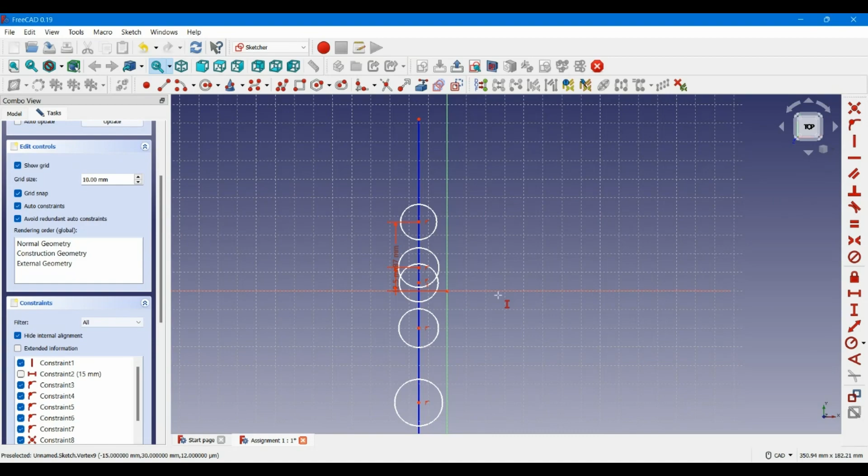The object that I have modeled is a test tube rack, which is a piece of laboratory equipment used to hold upright multiple test tubes at the same time. Common test tubes usually have a diameter anywhere between 10 and 20 mm with a length of 100 to 150 mm. This here is a sped up video of the entire designing process in FreeCAD. As it is being shown, I mostly use the sketcher and part workbenches.

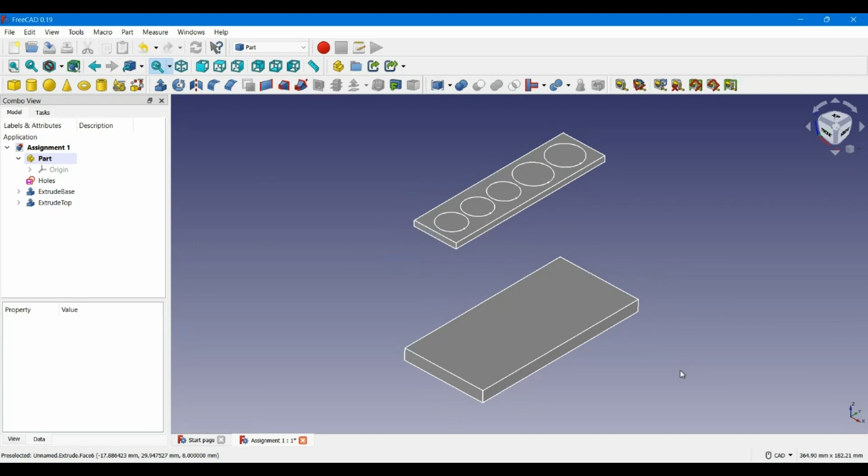First, I drew a sketch containing the 5 circles that would form the holes, 2 of diameter 22 mm, the rest of diameter 18 mm. Then I created 2 more sketches parallel to the XY plane, both of rectangles but with different dimensions. These 2 on extruding perpendicularly became the base and the top portion of the rack. Then I made the 2 side supports, similar process just parallel to the XZ plane this time.

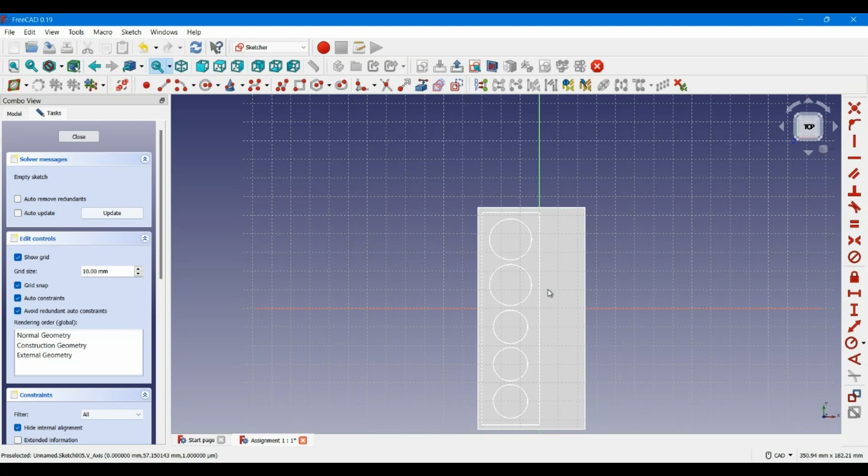Next was the row of vertical cylindrical protrusions over which inverted empty test tubes can be stored. For this, I again extruded a sketch containing 5 circles, diameter 9 mm each. In the exact same way, I then turned the first sketch into a row of cylinders through the top and subsequently cut out the holes by the Boolean cut operation.

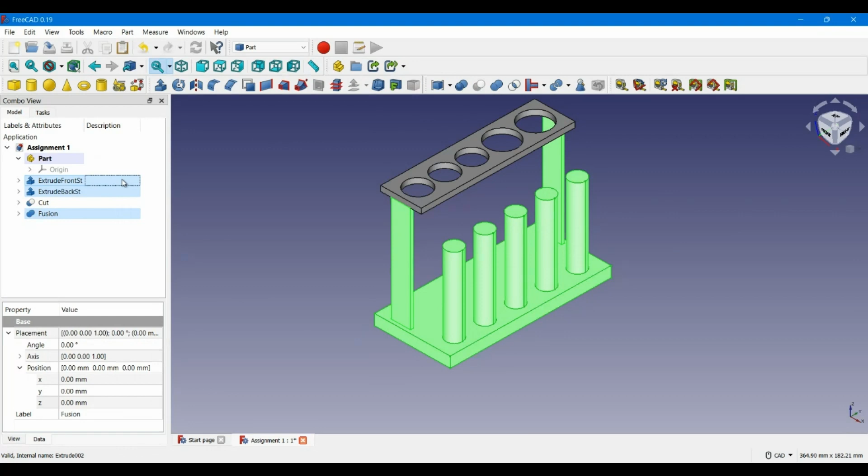Now here, using the cylinder tool is also viable, but I found extruding from a sketch to be an easier way to simultaneously get multiple cylinders. In general, several methods can be followed to make something. It's fine as long as we get the desired outcome.

Finally, I had to make a row of dents, one below each hole. These are there to prevent the bottom of the test tubes from slipping on the rack after they are put through the holes. I made a row of 5 spheres with appropriate radii, positioned them properly, and then used them to cut out the dents from the base.

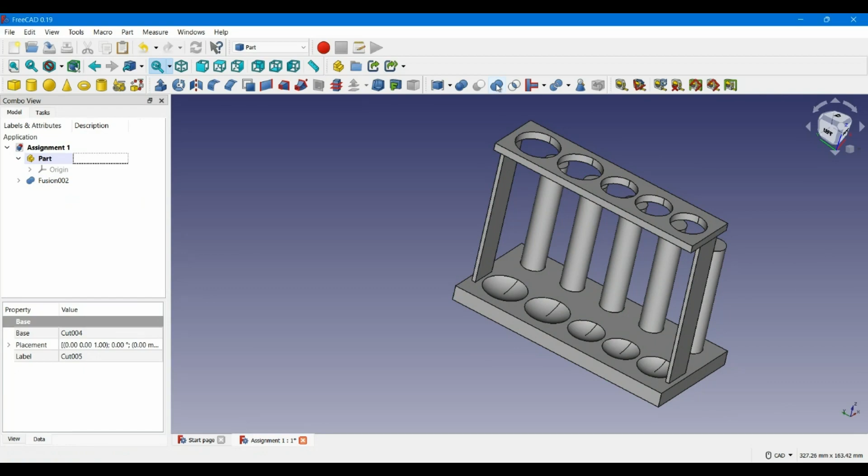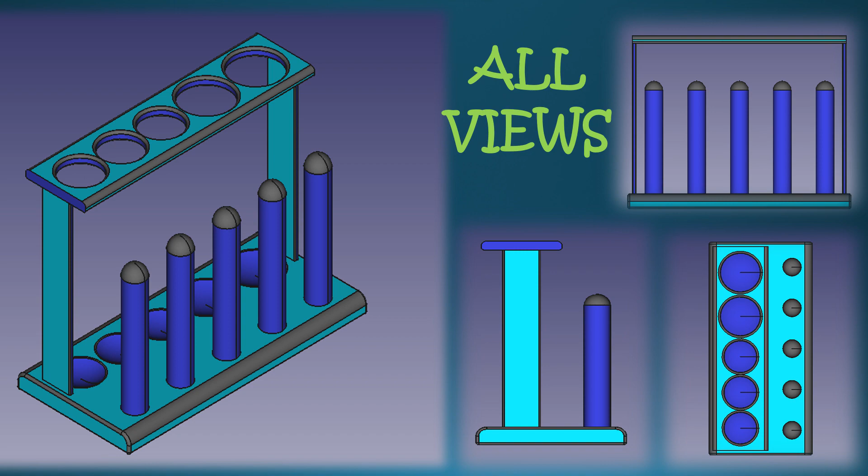Then I fused all these parts together with the union operator, but it was still quite crude looking. So for the finishing touches, I filleted all the sharp edges and corners. And while I was at it, I also colored the rack, which actually has no purpose apart from consuming time. Talking about time, what took the longest, of course other than getting the idea itself, was actually getting the dimensions of each component just right so that the final object looked realistic enough. In the end, this is how it looks from the top, side and front.

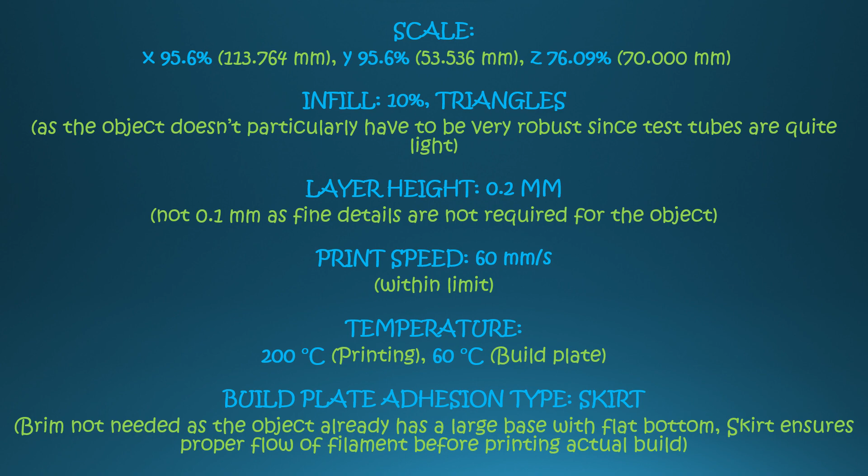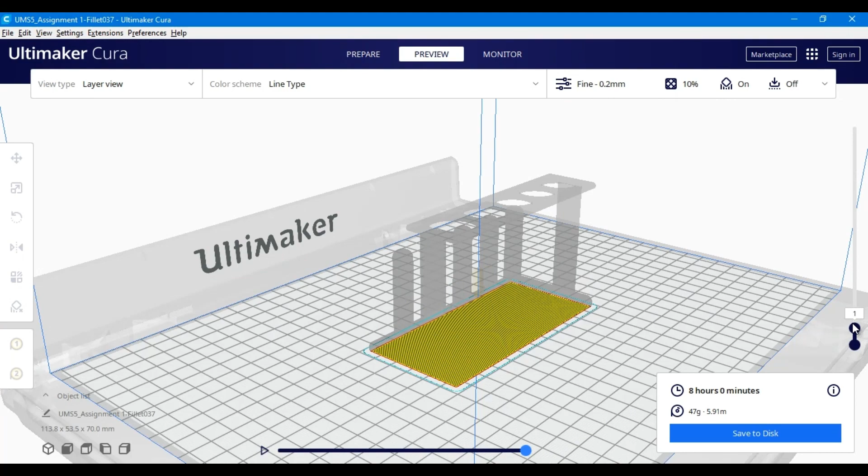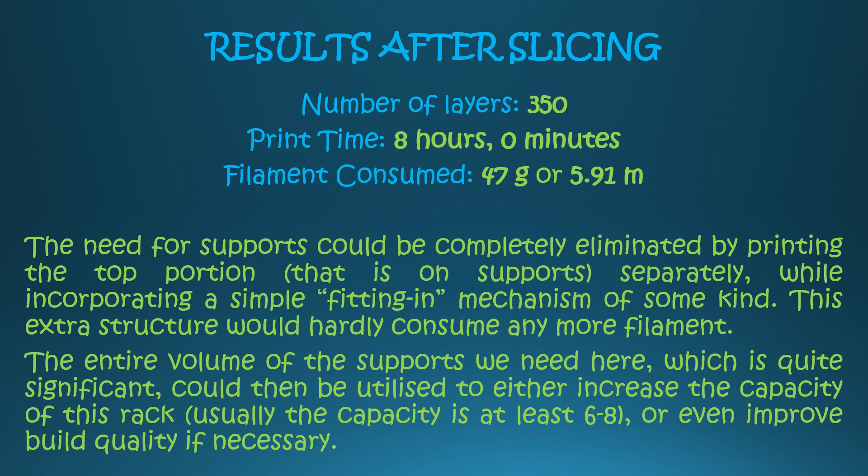A big imperfection noticeable here is the amount of material being wasted as support. This can be solved by changing the design a bit or simply making the top part detachable. But the question states that it is preferable to have a single part, so I didn't try separating the top. Here we have the final results. And now one last look at the finished product.